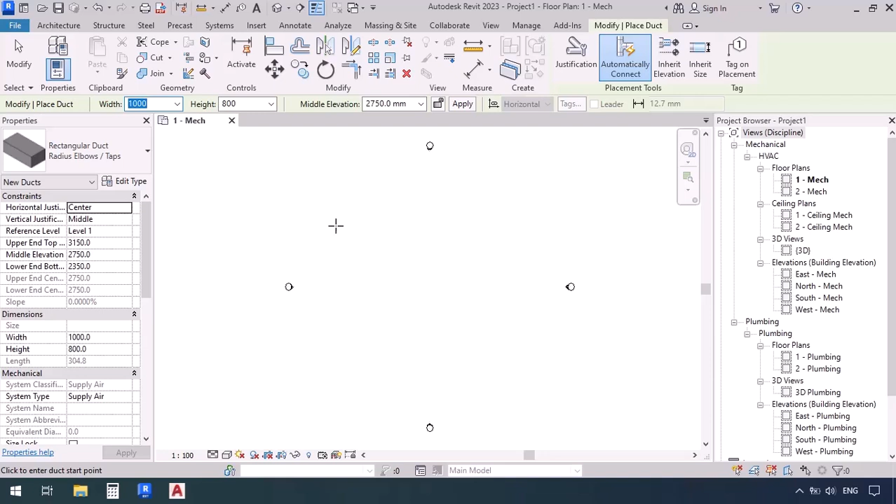I'm going to start drawing a set of ducts with the width 1000. I'm going to put a simple number so that you can understand it better. The first click, I'm going to zoom in a little, and the second click, click again and escape. Now I'm going to draw the same thing right next to it. Now the escape key, and I'm going to draw another one.

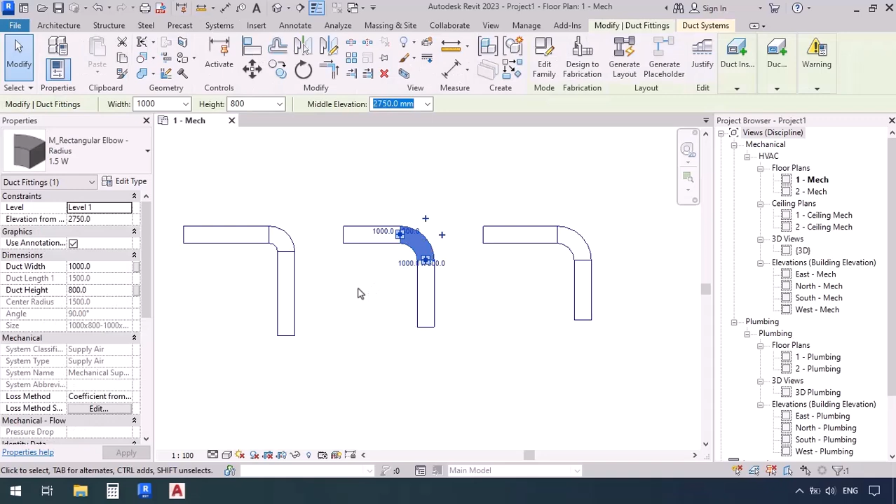And now escape again. Now if I select the first one's elbow, here in the properties window, do you see how it says 1.5W? So we're going to open that. Here we can see that rectangular elbow radius has 3 different subtypes. For example, we're going to select 1W. So now the first one's 1W, the second is 1.5W, and now we're going to select the third one and set it on 2W. Now what does this W mean?

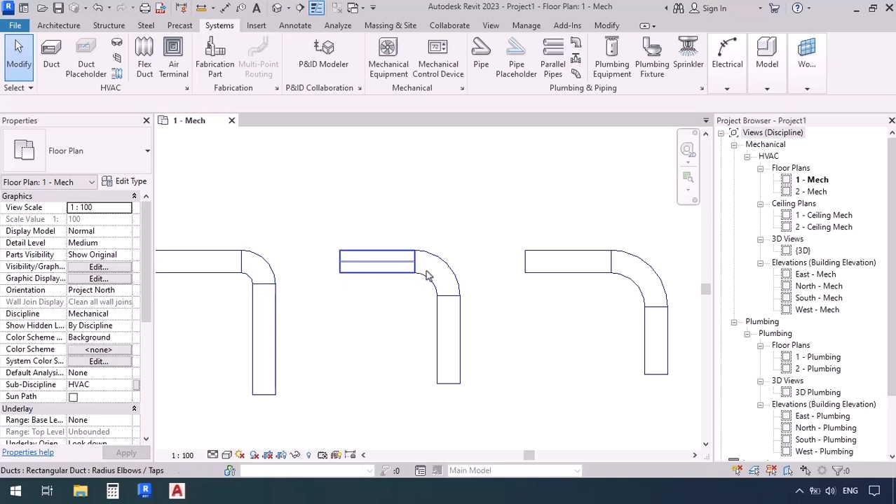If you pay close attention to them, you will see that as their number increases, the elbows bend with a bigger radius. So now, what does that 1.5W mean? If we want to understand that a little better, we have to draw the central line of the elbow.

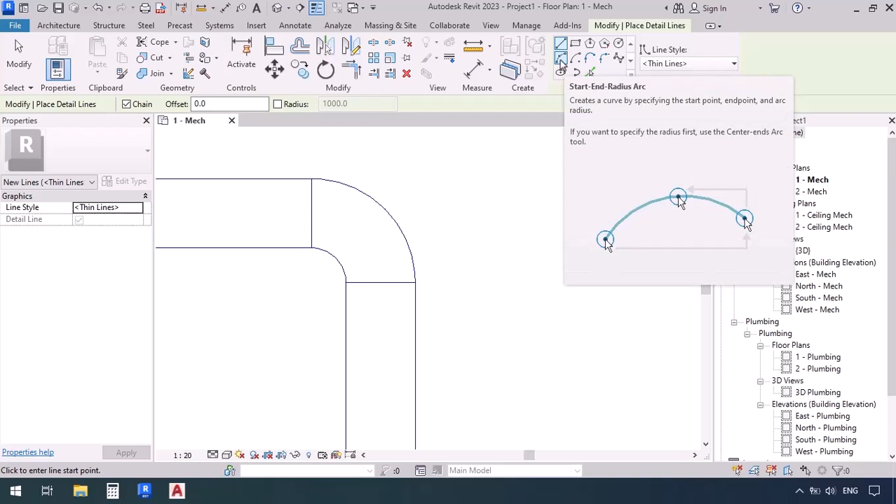So now, if we want to do that, we go to the Annotate tab, and then we go to Detail Line because we are trying to draw a line, but the line type is arc. This is actually an arc, which is start-end-radius, meaning that we have the start point and the end point and the radius. Now the third click and escape. And now we are going to extend these lines so that we can see the center of this entire circle.

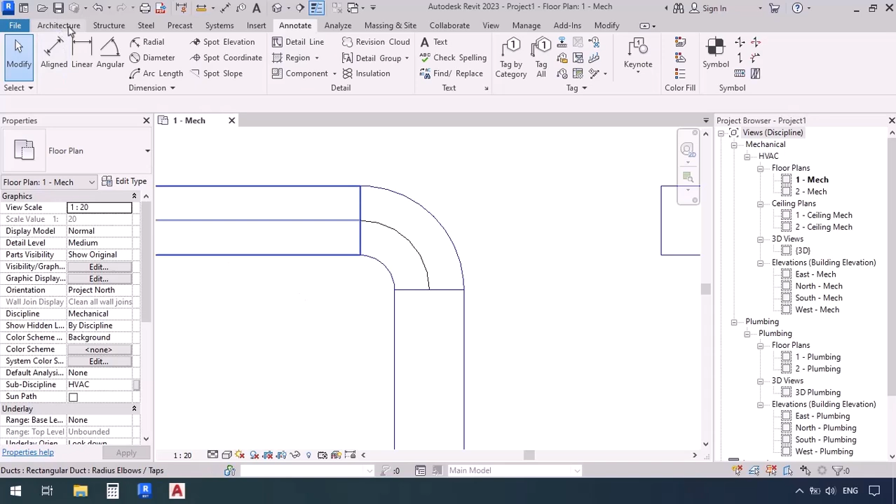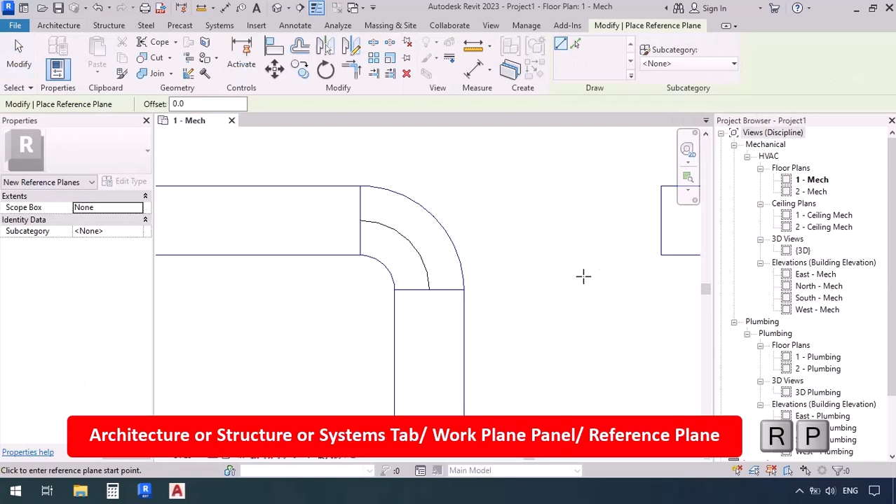From either the Systems tab or Structure or Architecture, no matter which of these tabs we go into, at the end of their ribbons we see a panel named Work Plane and a command called Reference Plane. And its shortcut is RP, so make sure you memorize it because you will be using that a lot. So we go to Reference Plane because we are trying to draw a reference line. In fact, it's the reference or guide plane.

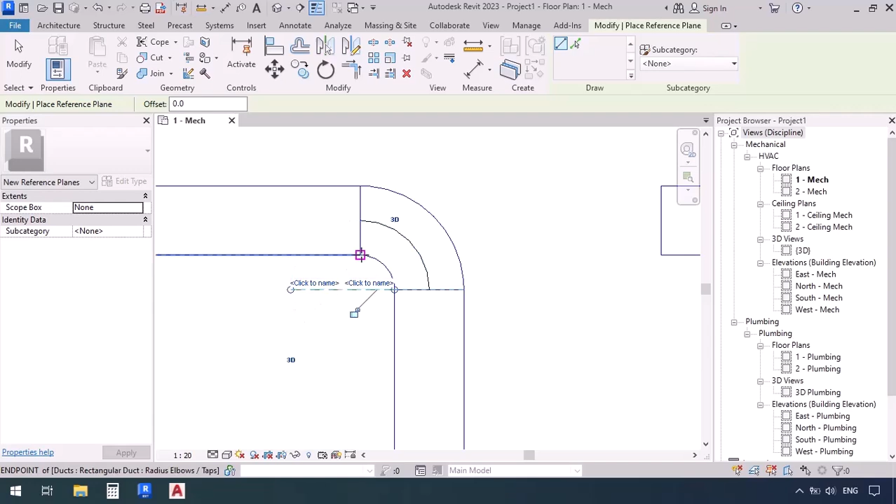But because we're looking at this page from bird's eye view, we can only see lines. It's actually planes that are placed vertically. So now we're going to click here and a little over here, click again. Now another click and click again and escape. Okay, so this is a plane, and because we're looking at it from bird's eye view and it's vertical, it's showing us in dashed lines.

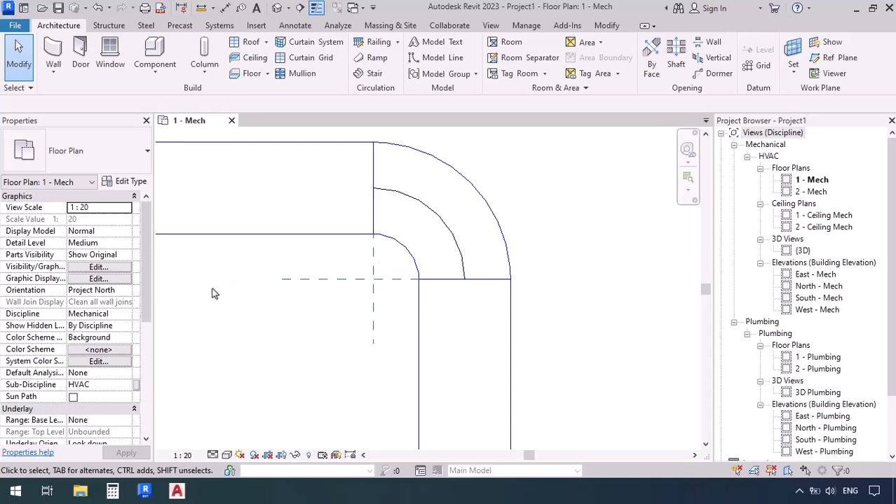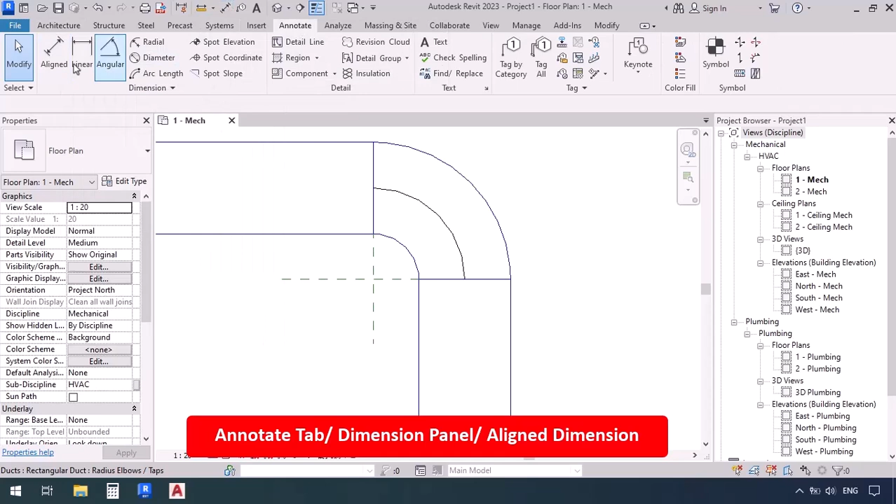Alright, now we want to find the radius of this one. We have to measure from this center up to here. So we're going to go to the Quick Access toolbar and select the Aligned Dimension command. If you recall, we said that each command that is in the Quick Access toolbar already exists in any of these ribbons. So where is this command placed originally? It's in the Annotate tab, and here it is, Aligned Dimension. So in case this one's removed from here, remember this is where you can find it.

Alright, now we want to measure from here up to here, and press Escape. Do you see this is the number that it's showing me? It's actually the radius of this one. It's 1000. Now we're going to select Aligned Dimension again. Now the first click and the second click, and when you find where you want to place it, you make the next click and press Escape.

So what just happened here? Now we know that this central line's radius is 1000, as well as the width of our duct. So 1000 divided by 1000 equals 1, which means that the radius of this elbow's arc is actually the same size as our width. It's 1W.

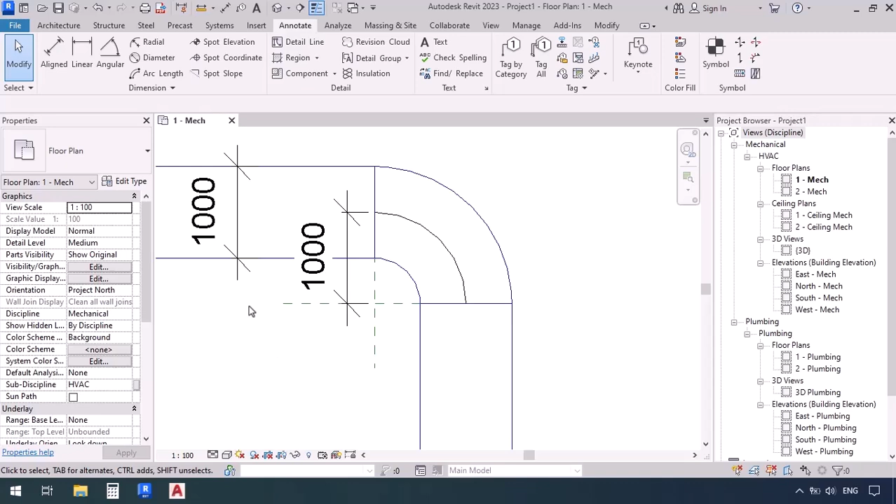What about this one? Let's measure it with aligned dimension. From here to here, 1500, as well as the width of the duct. So 1500 divided by 1000 equals 1.5, meaning that the radius of the elbow is 1.5 times the width of the duct.

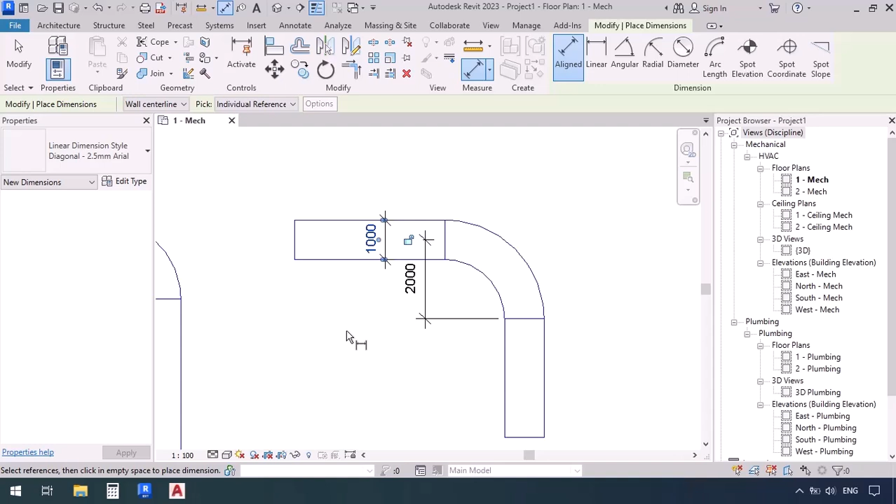Now for the last one, click and click. 2000, click and click, empty space, third click, and escape. So 2000 divided by 1000 equals 2, as in the radius of the elbow is 2 times the width. It's 2 times the size of it. We can do these measurements both in AutoCAD and Revit itself.

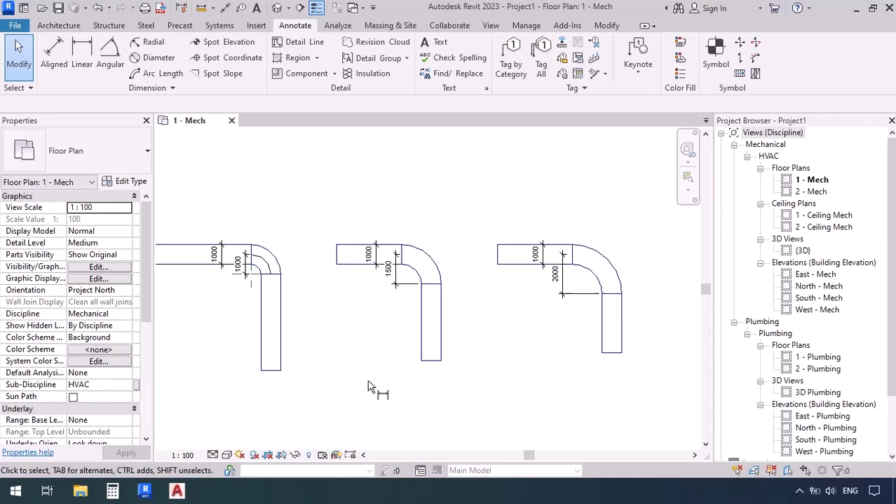So when it said that the radius of the elbow was 1W, 1.5W, or 2W, that actually indicated the size of the radius of the arc compared to the duct's width. So can we add a new radius? Yes, sure we can. How do we do that? We can go to the Systems tab and then find and select the duct fitting command. So let's click on it.

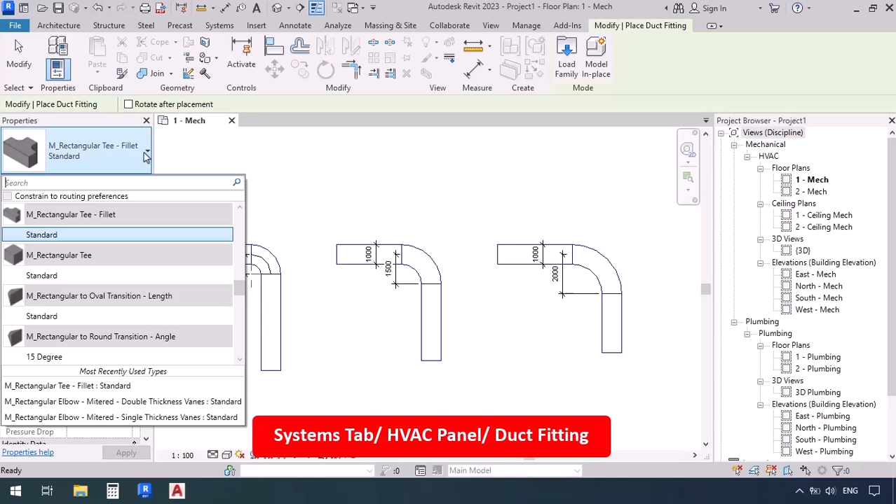And here you can see in the Properties window, if we open this drawer, it will show us a list of all of the fitting types which have been included into the template that we have loaded on the project. All of them. You can see all of the radius, elbows, T's, taps, circular, rectangular. So what are we looking for? We are looking for elbow.

So you can see up here we have a search section. You can see it's also blinking. So we're going to type in elbow. Now every family which includes the word elbow will be shown here. We're going to look for rectangular radius elbow and select it. We're going to click on one of these types. Then we go to Edit Type.

And do you see this radius multiplier here? You can also see a description for it. The multiplier is 1. So we don't want to change that right now because we want to keep it 1W. So we're going to get a duplicate. And this number 2 has been added so that it wouldn't get mixed up with the original. So we're going to delete all of it.

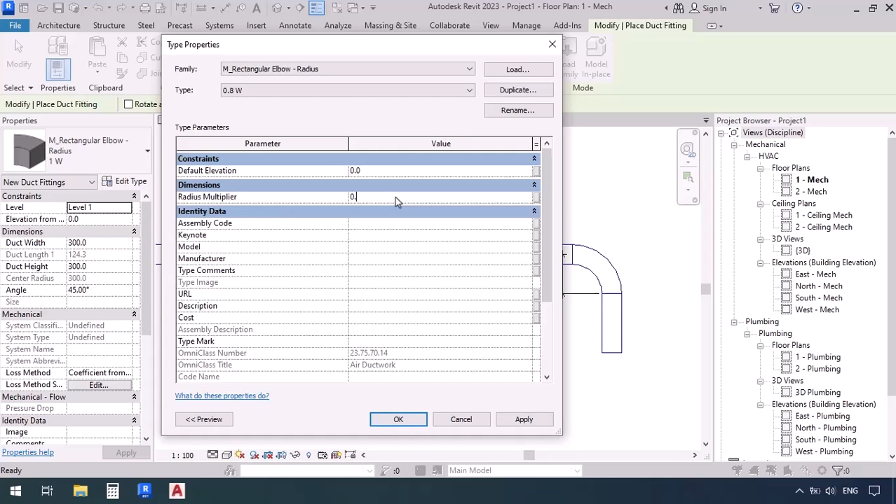And for example, I'm going to want a 0.8 multiplication. So I'm going to type in 0.8W. This is just the name. We're going to click OK. And then we go change the multiplier to 0.8. And now OK. Now if we go back, we can see that a new multiplier has been added for the elbow, which you can see it's 0.8.

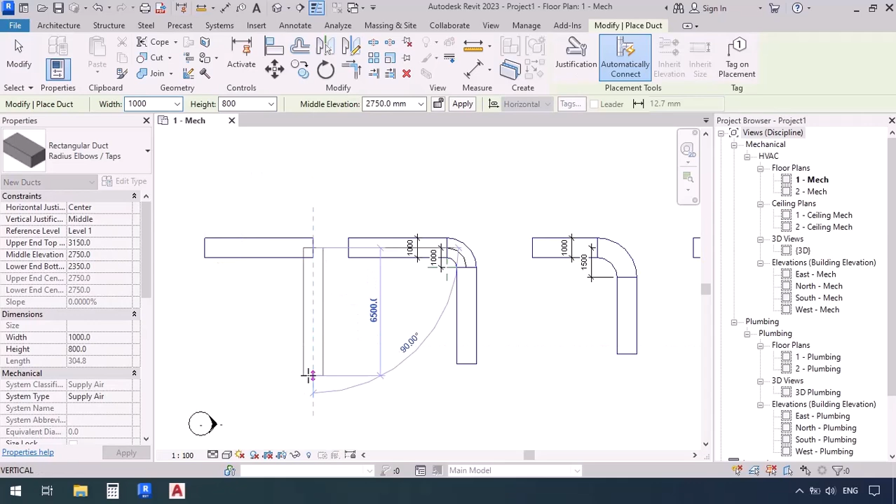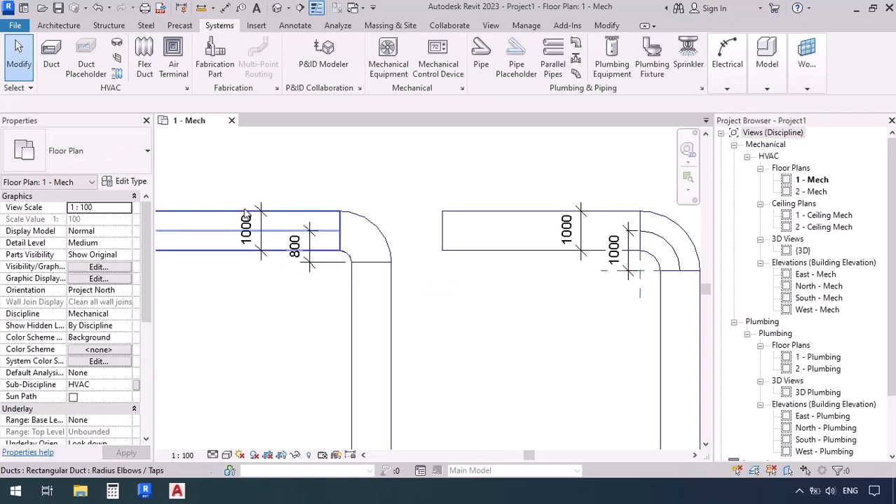So now we're going to open the duct command with the shortcut DT. Now let's draw a couple of ducts. Now escape. Let's select this one and set it on 0.8W. Let's measure it to make sure. We go to Align Dimension and from here to the center and blank space and click. Again, first click, second click, blank space, third click. And now it's 0.8. 800 divided by 1000, 0.8.

So now you know that you can add any radius that you would like to your project. Depending on your project, you can measure your radius to know what it is and use it in your modeling.

So now we know that if we go to Load Family, actually this is how you can find families. Insert tab, Load Family. You see, generally you can find Revit's tools in lots of different places. This makes them more easily accessible. So if you see Load Family somewhere else, know that it's the same command, it's the same thing. It's only been put somewhere else so that you can find it faster. Actually, let me cancel this.

You see, even if you go to the Systems tab and the Duct command, and then go to Edit Type, so you can edit a fitting, you can also find Load Family over here. So in case I can't find a family here in this list, I can just easily go here without having to close these windows and go ahead and load our family. So besides that, we can also go to the Insert tab and find Load Family. Actually, let's go back a folder and go to Elbows.

Because these families, these elbows that you see right here, we want to see what they look like, so that in case we see an example or we're working on a project, we would know which one we have to use, and then load and apply that one on our work. If you take a look at this file, you can see all of the different types of elbows listed here.

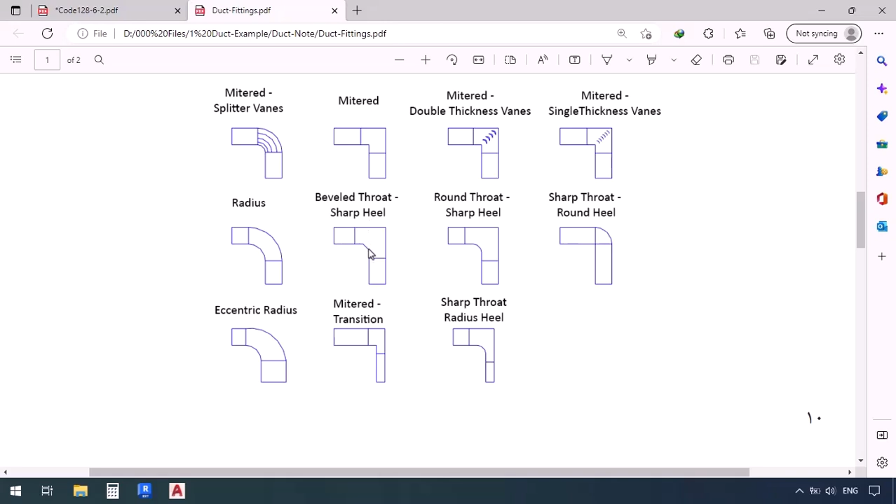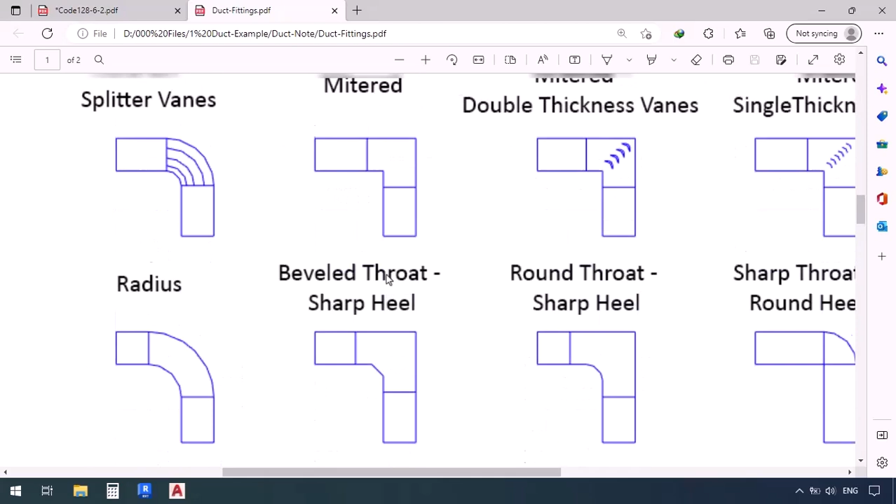Now, radius, which was that round one, beveled throat sharp heel. Actually, the throat part is this part of it right here, as you can see. This one says it is beveled. This means that it has been given new angles and corners, and this name has been used in multiple places of Revit, so remember to memorize this one's meaning. It means that its corners have been broken into angles, and this part of it, which is the heel, looks sharp. In fact, it's the same thing as the mitered, but this part of it is beveled.

This one says round throat, and as you can see, the throat looks round. Sharp throat, this sharp part right here, and round heel. And then down here, you can see the transitions actually, as in they are a mix of two or multiple different dimensions. The size of either ends of an elbow could be different from one another. This one's called eccentric radius. The size of this end is different than this one, and it looks like something like this.

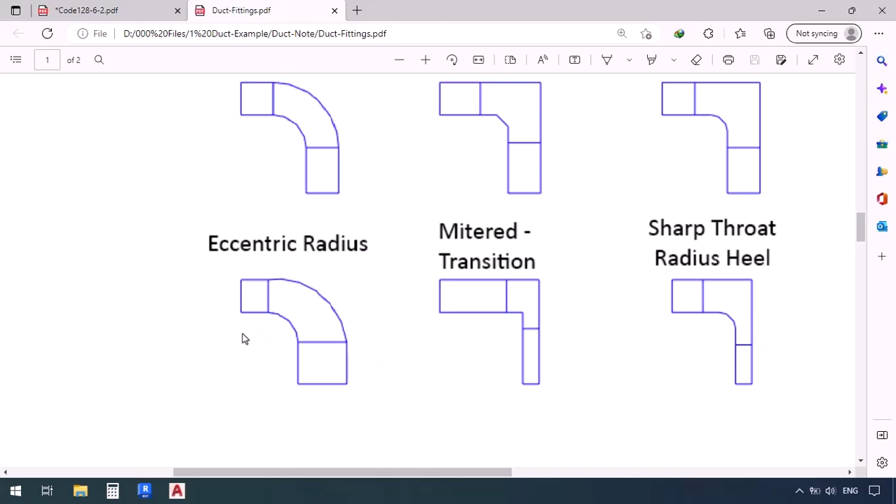Now, mitered transition is again the same thing. It has been transitioned, as in the size of both ends are different, as well as this last one. It's a transition, it has a sharp throat, and this part right here has a radius shape. So these were all of the different types of families that we had for Revit. Actually, what I'm trying to say is that here in this elbow folder, these are the different types of families that we have.

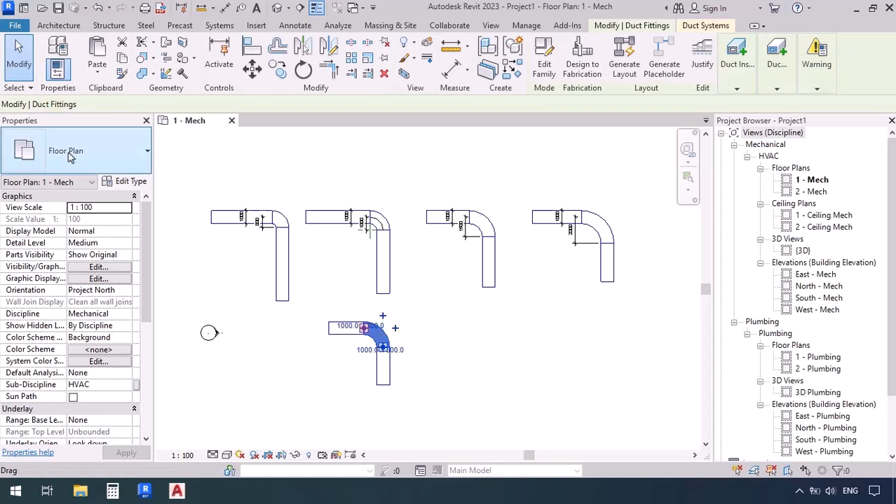Now, another point is that when I was trying to draw these four examples, I went to Systems, Duct, and then selected one of these radius elbows and started drawing. And then I selected the elbow and set it as 2W or 1.5W. Now, if we are working on a project which is clearly including all 1W elbows, or any other number for all of them, in that case we have to set that as the fittings type.

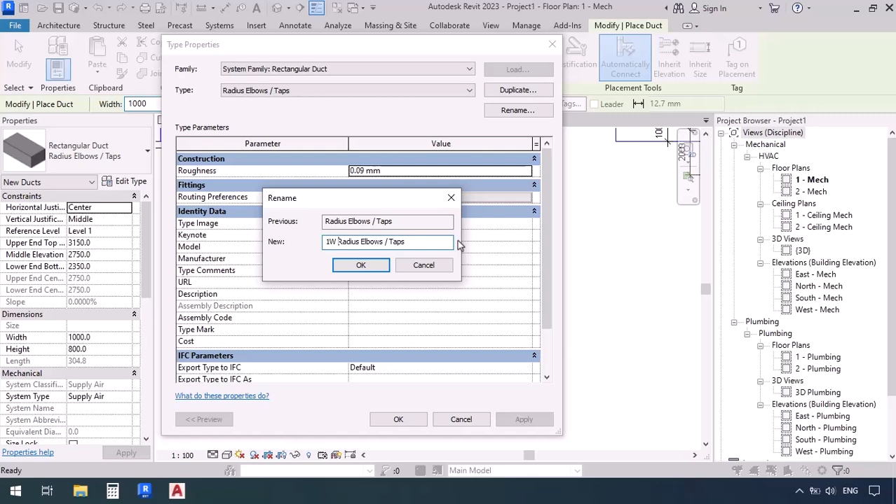As in, we go to the Systems tab and open the Duct command, then we go to Edit and say that we want to use this type, but I want all of the radius elbows to be 1W. We can either duplicate and create a new type, or we could rename this and then write down 1W radius. So now we just edited this one's name. After we do that, we should also edit the fitting.

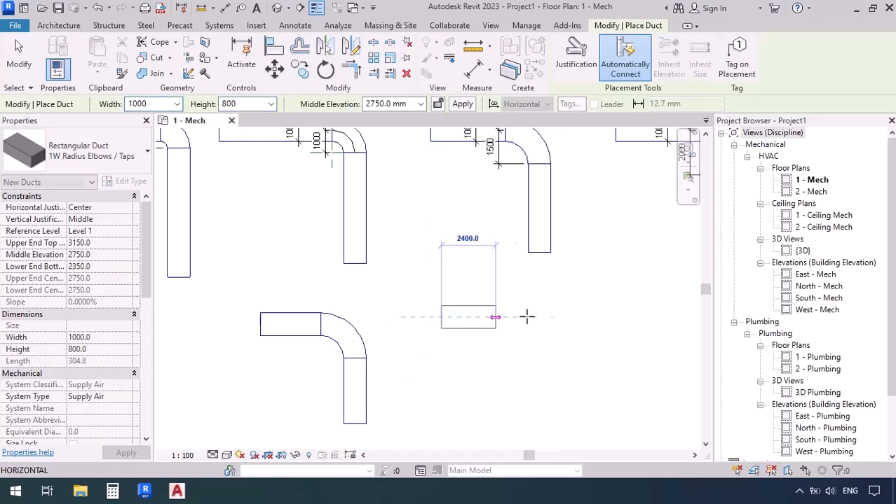So from now on, if this type was to be used, and in case a fitting needed to be added, we want them to be 1W elbows. Now let's close these windows. So from now on, any fitting that is added, it is 1W. It saves us from having to select each and every single one of the fittings and edit them.